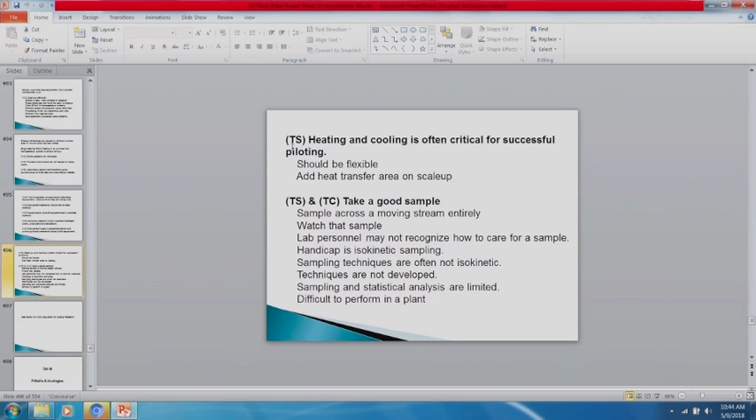I think last time we ended up with pitfalls and analogies. I think we covered heating and cooling. Pitfalls and analogies.

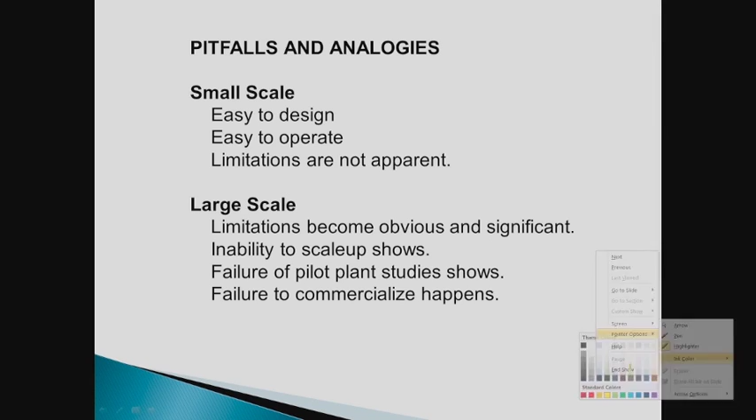Anyway, small scale is easy to design and easy to operate. Limitations are not nearly apparent. But at large scale, limitations become obvious and significant. The inability to scale up shows, the failure of pilot plant studies shows, and you have failure to commercialize, basically.

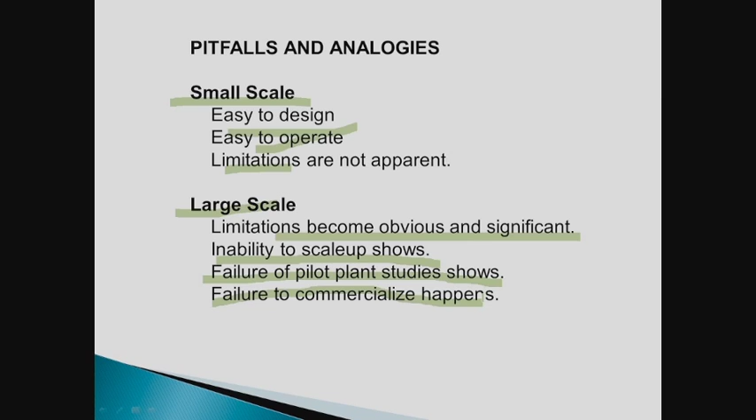In the technology transfer area, there exist some human attitudes, right? NIH, not invented here. People have an attitude that if we didn't think about it, then it's not worth worrying about. You also have people working in a box. That's tough. You also have poor communications. That's tough. And you have a definite lack of information. Now these are serious problems, right?

And we'll toss in the concept of the expert here for a second. You've got all kinds of experts out there. I quit being an expert professionally because I was more of a student rather than an expert—I was constantly learning stuff. So what happens if you have two experts together? They never really seem to agree. They're arguing, okay? And if they argue and disagree, it means that one of them's wrong, or at least one of them's wrong. Both of them could be wrong. My suggestion is, if one of them's wrong, why are they called experts?

So this human aspect of scale-up is quite interesting. It can lead to very serious problems.

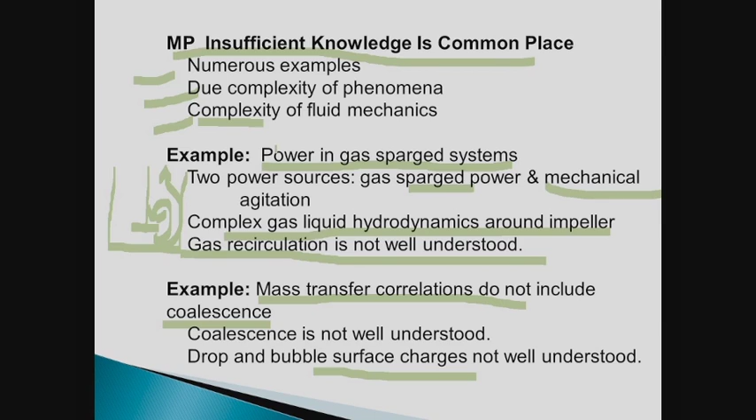Surface charge, electrical charges, being another. Anyway, so things are complex. That's the whole idea—it's a very complex environment.

Some process objectives are incompatible—basically, they can't be met, right? Procedures and operations available in the laboratory are not available in the pilot plant. Some of these are obvious.

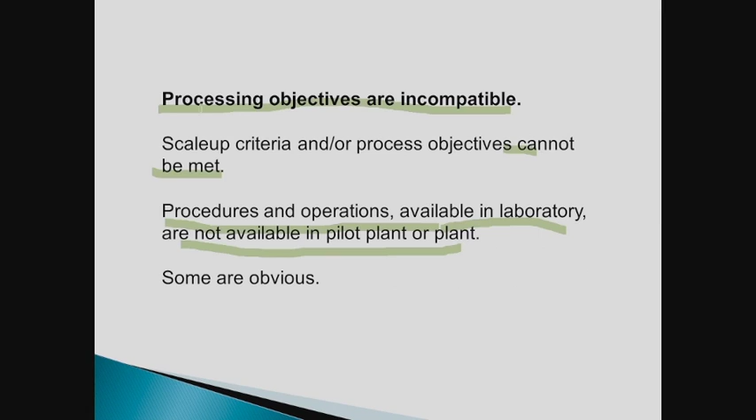An example is shaking tables, right? You can shake laboratory equipment—you can have a shaker table with beakers on it. You have a beaker here, and over here another beaker, and you can do your studies in beakers on a shaker table. You don't have that in the pilot plant.

So that's an example of something that's basically non-scalable. It's the idea of scalability—some systems are not scalable, they don't lend themselves to scaling. To be asked to scale a non-scalable system is painful for everybody involved.

Some processes cannot be scaled to larger sizes for technical reasons. One of them is that the phenomenon simply doesn't happen on a large scale.

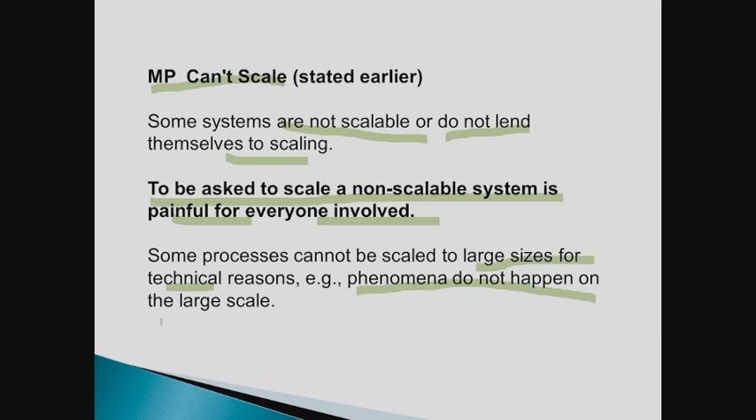An example: if the chemist has to break the beaker or the test tube to remove the product, that scale-up is not going to be easy. If the reaction yielded a sticky product which accumulated on the impeller, in the lab reactor they just shook it to remove the product, but you can't shake a 10,000-gallon reactor in the plant. You may perhaps jostle the impeller a little bit, but whether that lets the material come off, I'm not sure.

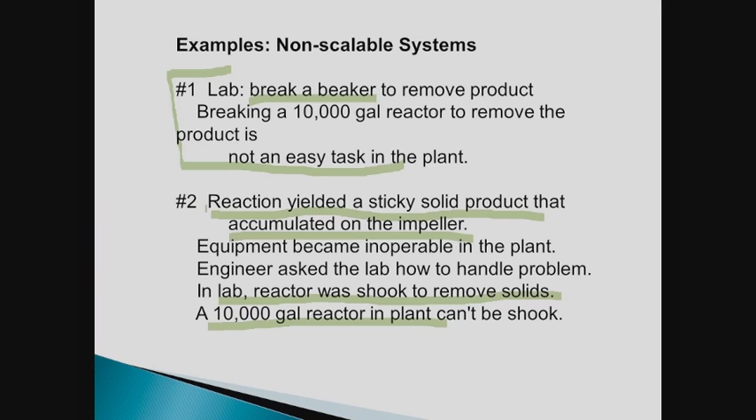Scale-up of a splashing regime, like shaker tables, is not necessarily possible—although I would enjoy the challenge of seeing if you could scale up from shaker tables to an agitated tank. That would be quite an interesting scale-up question. You can't have a 10,000-gallon shaker.

Some phenomena cannot be scaled since the phenomena don't exist at scale. The zeta potential is an example. Zeta potential measures, I think, the voltage across the double layer. So in the double layer, you have a lot of pluses here, and the pluses attract minuses—that's the double layer, with this being a surface.

That potential voltage drop across the double layer is not scalable, because often the flow regime changes and there is no double layer—you have flow coming in, removing the charges and carrying them off. In a highly turbulent flow, there's a lot of surface renewal going on, and a double layer is much more difficult to form.

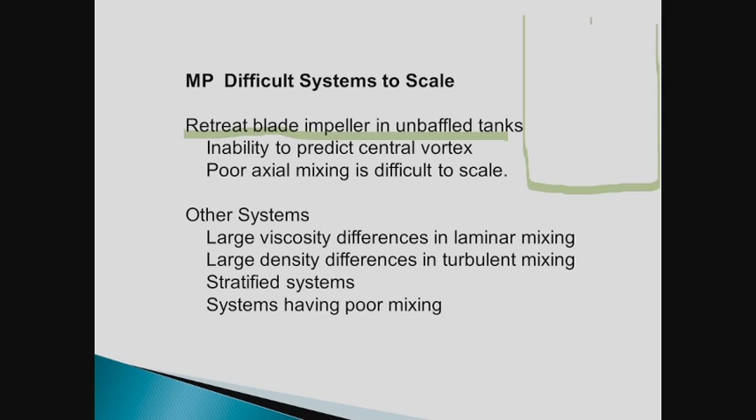Difficult scale, retreat blade and unbaffled tanks. I'd have to say that it's difficult to scale. You take this Pfaudler design, looks like chicken legs, right? It's made of glass, and it has maybe a baffle in here, a beavertail baffle, or an H baffle. H looks like that, I guess.

Now, the reason why this impeller is difficult to scale - by the way, this impeller is used everywhere in the pharmaceutical industry, about 50% of its use is in pharmaceuticals. So it's a very popular design, primarily for two reasons. One, it's glass, and two, glass is inert, doesn't participate in the reaction.

It also has a very large D over T ratio, D over T ratio of 0.7. That makes it very effective at mixing - a very effective large diameter impeller.

The problem is the flow behavior in this tank is a function of fill height. If I'm going to fill it all the way up, where the height is equal to the diameter, you have the beavertail baffle or the H baffle in there. That's one set of behaviors.

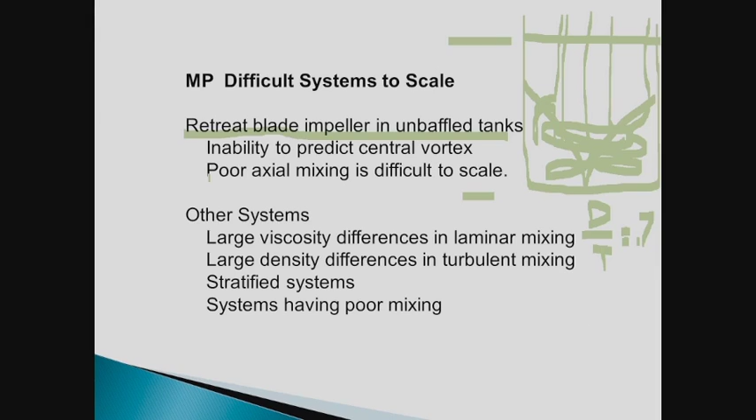differences in performance. So we call that - it might be considered a central vortex, and the inability to predict the vortex or the effect of liquid height on the vortex. With the vortex going through the impeller, you're going to have a lot of surface entrainment going on, probably poor mixing. Up here at the top, you'll probably have very good mixing.

Anyway, so you may run into difficulties in certain designs because the flow regime changes with volume or quantity, the hold-up volume. Remember, going back to our n theta, the number of revolutions to mix, it was a function of volume - n theta will go up as volume increases.

Other systems that perhaps will lead to difficulties in scale up. In laminar mixing, the viscosity is important, so you can anticipate large viscosity differences in laminar mixing may be difficult to scale. Similarly, mixing with large density differences - density is important in turbulent flow. As a result, large density differences may be difficult to scale up.

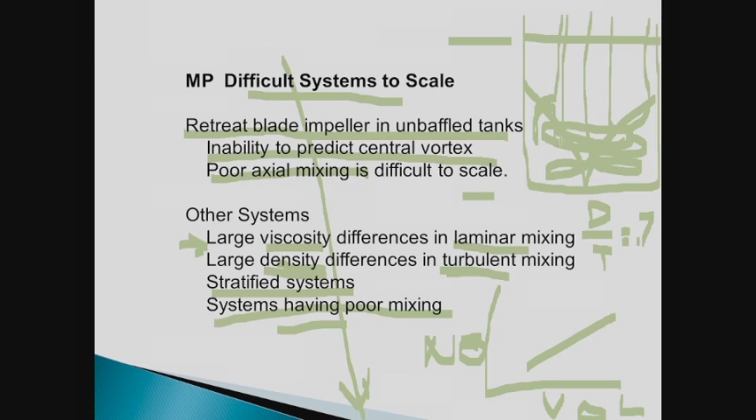So, transition regime - that's essentially also where the flow regime changes. Liquid height: a center vortex forms at low liquid levels, at high liquid levels there is no vortex formed. You have a difference in flow regimes occurring here. At low fill volumes, it may be very poor mixing because you have a tendency to have solid body rotation.

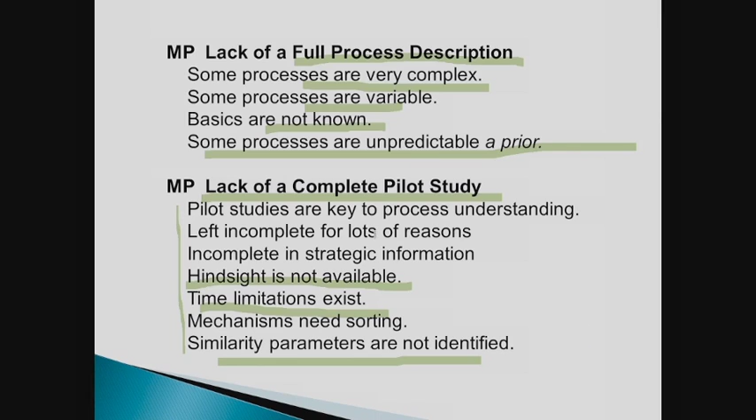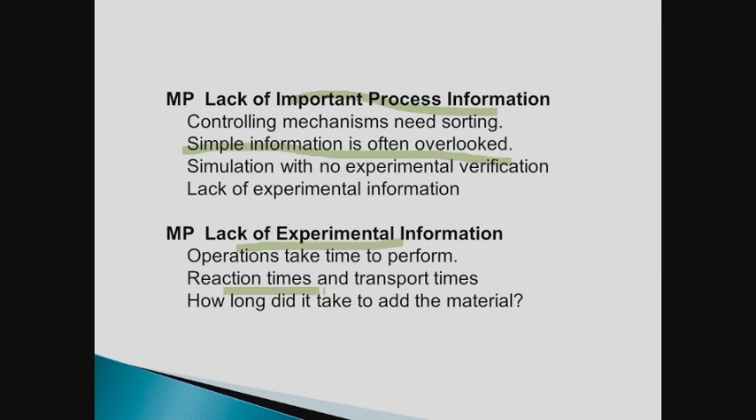So, lack of experimental information, reaction times and transport times or mixing times. How long did it take to add the material? Simple questions. How long did the reaction take? What was the dissolution rate?

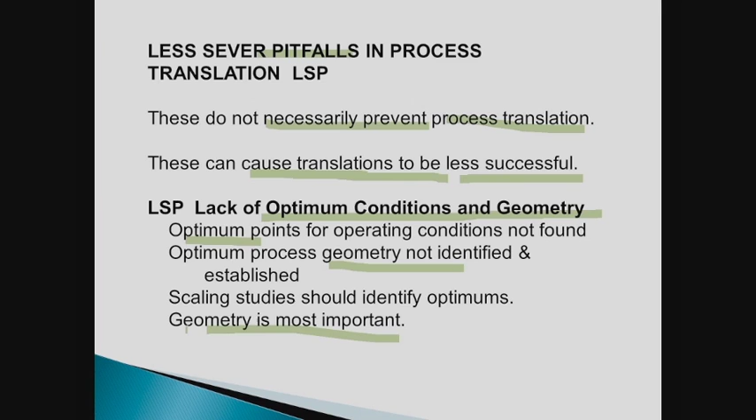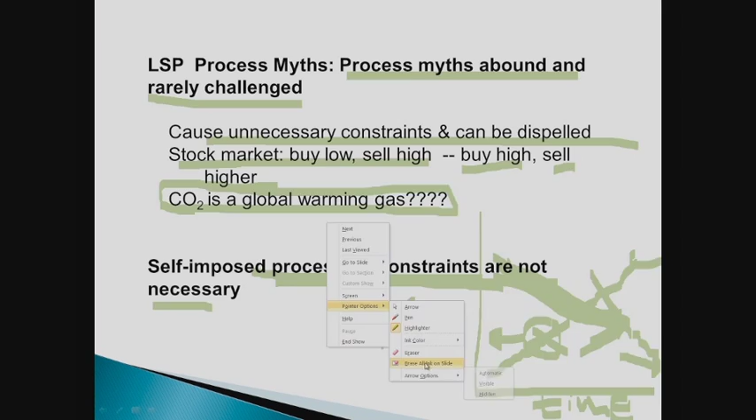Anyway, that's a suggestion. Now let's talk about CO2 a little bit, is it a global warming gas? You always see that being danced around. Just go camping. On a clear night, you're out there camping in your tent. So here you are in a tent, right? Everything's hunky-dory, and it's a clear night, and the stars are out. What happens on a clear night, it gets really cold.

Now then, if you camp out on a cloudy night, so we have another camping trip here, and it's all cloudy up there. And here it was very, very cold. And here what happens is the Earth radiates to the clouds, and the clouds radiate back. So on a cloudy night, it's a lot warmer, just generally speaking. So you got to ask yourself, why didn't the CO2 capture this and bounce it back to the Earth like the clouds do?

That's because CO2 is only sorta a global warming gas. It's not nearly as powerful as water. Water, in the form of clouds, is extremely warming, global warming. So the truth of the matter is, you should be monitoring cloud cover rather than CO2.

CO2, you got to recognize a very simple thing about it. It's plant food. That's the other thing about CO2. It's being picked on. Everybody turns around and talks about CO2, how bad it is. But CO2 is actually plant food. The plants use it with sunlight, and they go through this process of photosynthesis, and they make carbohydrates out of it. So CO2 is not bad. It's plant food, it makes carbohydrates, so it's a good thing rather than a bad thing.

It may come as an astonishment to you, what was really astonishing is the federal government declaring CO2 a pollutant when CO2 is plant food. Okay, I guess fertilizer or plant food is a pollutant if it becomes excessive. So anyway, some of these things about process myths should be questioned, like when they claim that the temperature of the Earth is rising, right? Global warming.

You have all these people on television or in the news talking about global warming, but they never show you any data. And in truth, if you go into this area and study it a little bit, there's two sets of data. One set shows global warming, and you talk about how the measurements were made. And another set of data shows global warming is not really happening. So you have two sets of data.

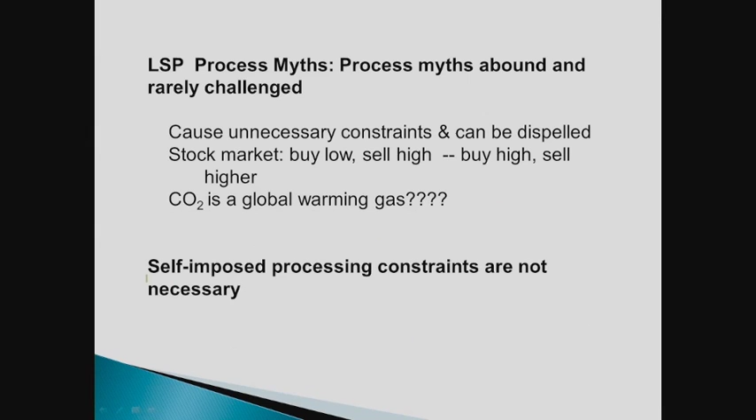So the whole idea is self-imposed processing constraints is not a good idea.

I think this is radioactive sludge, and only in famous tank 49 did the sludge have a yield point. In all other tanks, and there were 50 other tanks, there wasn't a yield point, at least as far as I understand the situation. So here's the Bingham plastic myth.

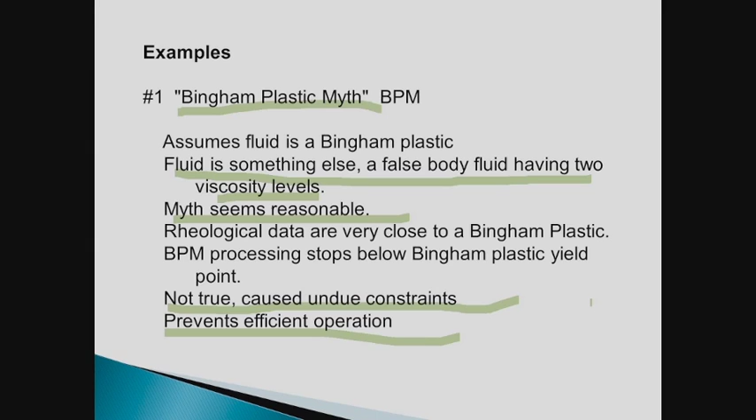But however, it's a process myth that every so often I got an email about this, saying I was wrong. Pretty funny.

Myth 2, the importance of rheology. Ooh, I'm going to get into trouble here. Oftentimes, the detailed rheology is unimportant. You hit the viscosity levels, you've got the most important part. However, the detailed rheology, you don't need it.

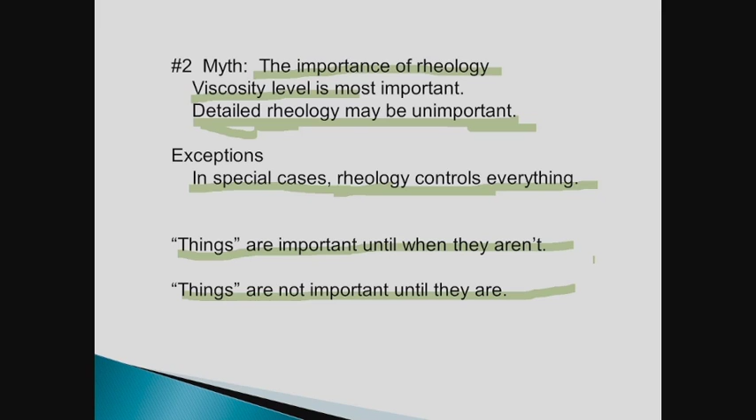Lack of time information - very important. Time is usually not recorded. Processes have different time scales. Again, your kitchen sink you can turn off very quickly, but a huge pipeline that's 10 miles long, 10 feet a second going through there, you can't really operate that like your kitchen sink faucet.

Lack of local flow behavior around the reaction zone. If the reaction is instantaneous, you need to record it as such. How long did it take to add the feed? At what level? How long did it take to fill the system? All kinds of questions.

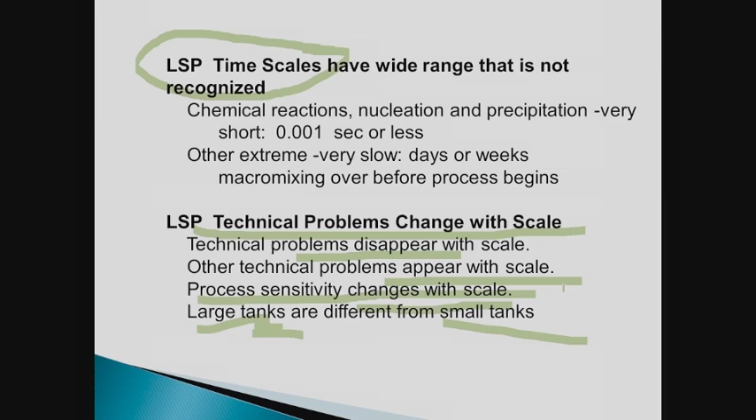Procedural requirements: unnecessary procedural requirements get scaled up, and that's not a good idea. Procedural requirements have to be based on the need for that particular procedure step.

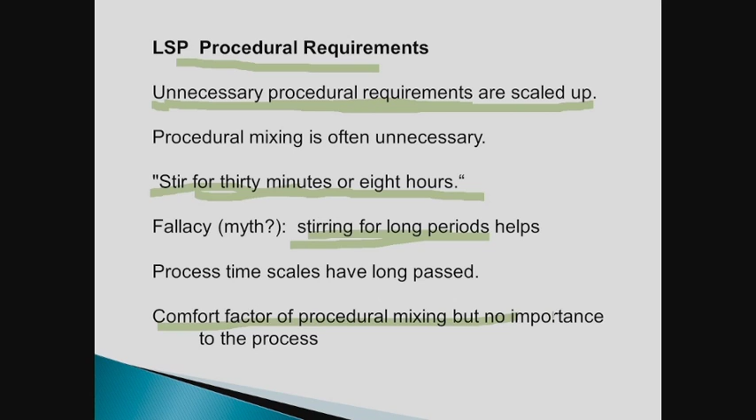You often see this: stir for 30 minutes or 8 hours, add and stir for 30 minutes or 8 hours. Stirring for long periods of time, I don't know what that does, but you ever notice people with their coffee, they continually stir it? Processing time scales have long passed—it's a comfort factor, apparently, with no importance to the process.

Local scaling and effects of heterogeneity: multi-phase systems are often heterogeneous, but spatial variations in properties occur. Specific local behavior may be important, and there's often little information on that local behavior.

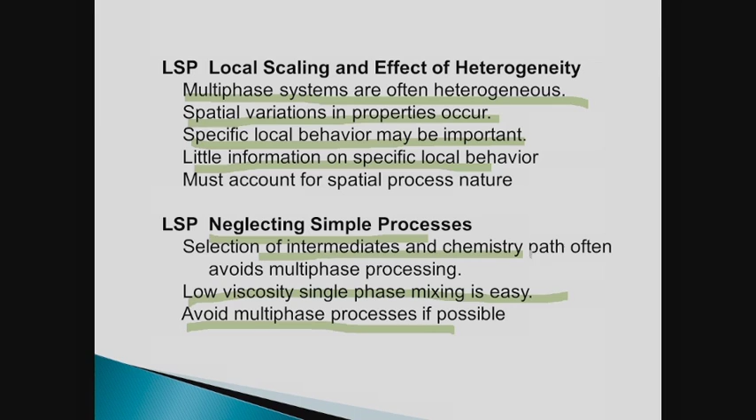Neglecting simple processes: low viscosity single-phase mixing is easy. You want to try to avoid problem processes and problem phases, and really select the chemistry path that avoids multi-phase processing altogether.

Lack of characterization of the process is very common. Inadequate flow conditions are also very common—good pumping and circulation may not be occurring, leading to formation of unmixed zones. An adequate D over T ratio may be necessary. Remember, in the transition zone, you can have an impeller mixing away, and it's well mixed inside this cavern, but the rest is stagnant.

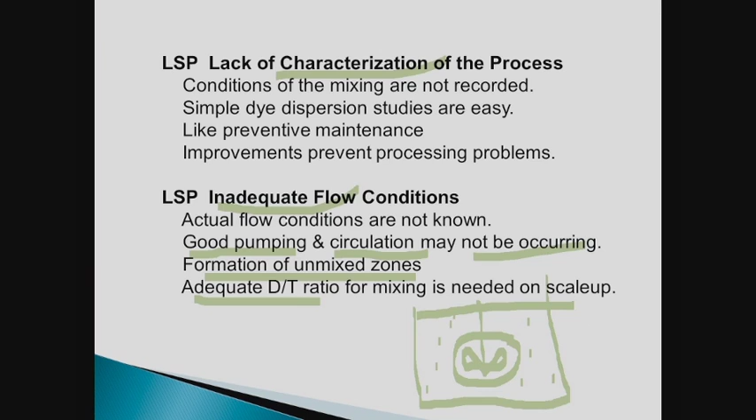Assumed models are often a source of problems. Avoid sticky solids are some of the worst problems—they adhere easily to equipment, are difficult to operate, clog pipes, and dewatering and filtering are expensive.

Materials change with scale, oh yeah. Material in the lab is not like in the pilot plant, and not like in the plant. Shear dependent viscosities: one shear rate in the lab, another in the plant, giving different viscosities in the lab, pilot plant, and plant. Moisture effects are very important, and material history is also very important.

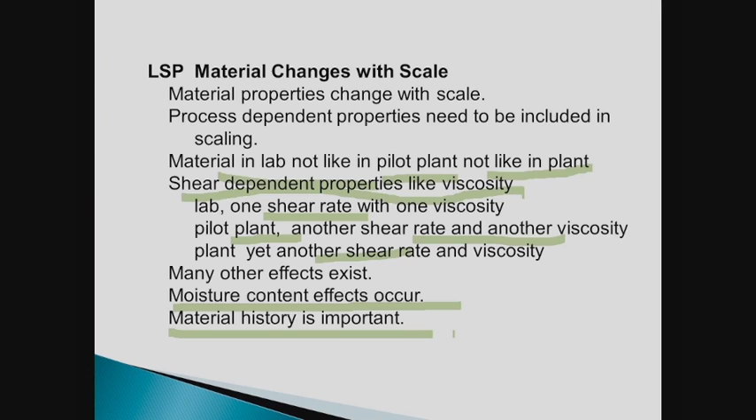Inadequate characterization of geometry: scale-up by draftsperson is possible and can occur, and this is not good.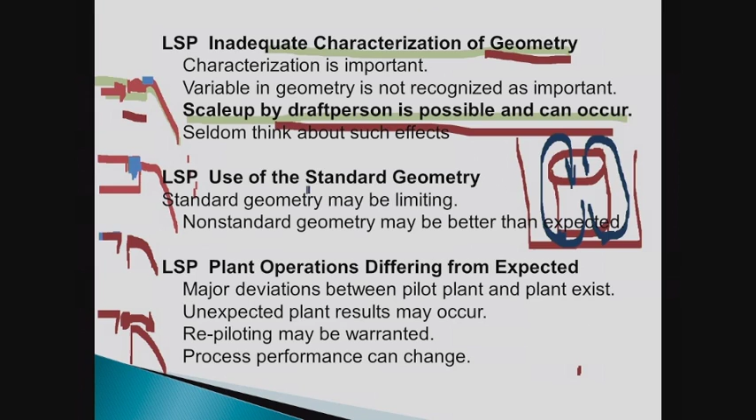Standard geometry—there's always better geometries. Non-standard geometries work better, right?

Here's a case in point. You had a crystallization process that looked something like this, and here you had a return line. So you had the crystals all up in here, and the return line—now they were returning a lot of large crystals, right?

So what they did in this crystallization process is put in a baffle, from right down here to there. So what happened then is the large particles went around and went out, whereas the very fine, really tiny particles went down and around the baffle and went out here. So there's a size separation here, right?

It's actually somewhat of a classifier. The larger particles sank, and the smaller particles were able to make the turn and go back to the crystallizer to grow more. Anyway.

A standard retrofit in industry would be a well-placed baffle. Well-placed baffle.

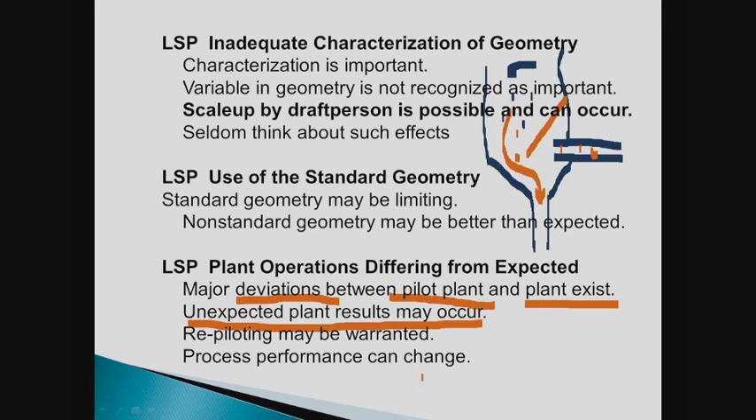Major deviations between the pilot plant and plant exist. Unexpected plant results may occur. Repiloting may be warranted, and process performance can change. So you want to keep your pilot plant—I don't know if I brought that out or not. You always want to keep your pilot plant so you can do some testing or process improvements.

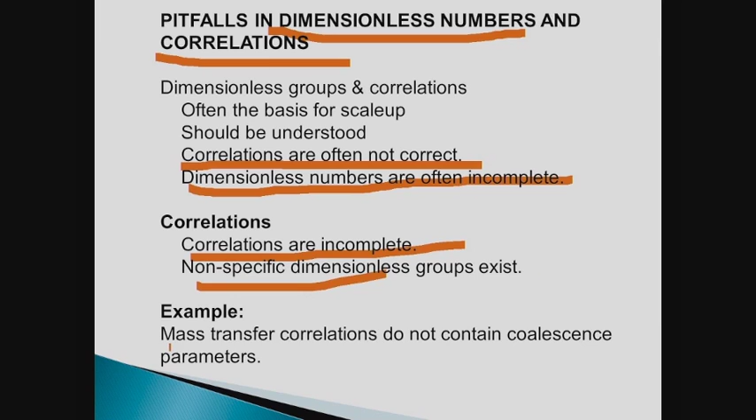Correlations, dimensionless groups, and correlations. Correlations are often not correct. Dimensionless groups are not complete. Correlations are incomplete, nonspecific—mass transfer correlations—you're starting with very limited data.

And the first one is Reynolds number, okay? Reynolds number is a fantastic number, but it can be very nondescriptive of the flow field. Equal Reynolds number does not mean same flow field. Very important point: a large diameter impeller at low speed has the same Reynolds number as a small diameter impeller at high speed. However, they're quite different in performance, even though they have the same Reynolds number.

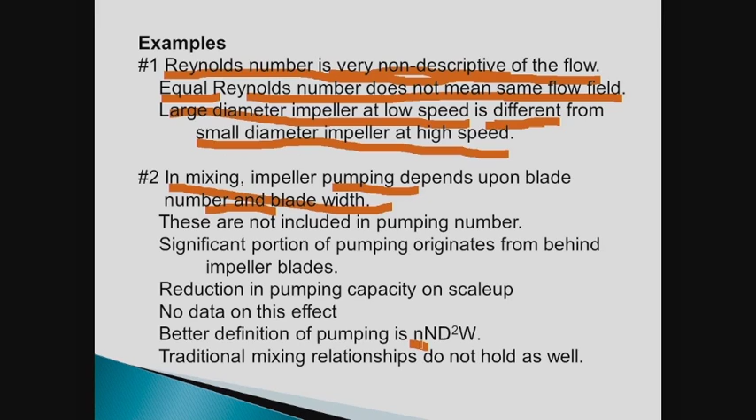And in mixing impeller pumping, there's got to be a blade width effect. Here's blade width effect and blade number effect. This is the pumping number that ought to be used—it ought to take into account the number of blades and the width of the blades. Better definition of pumping number.

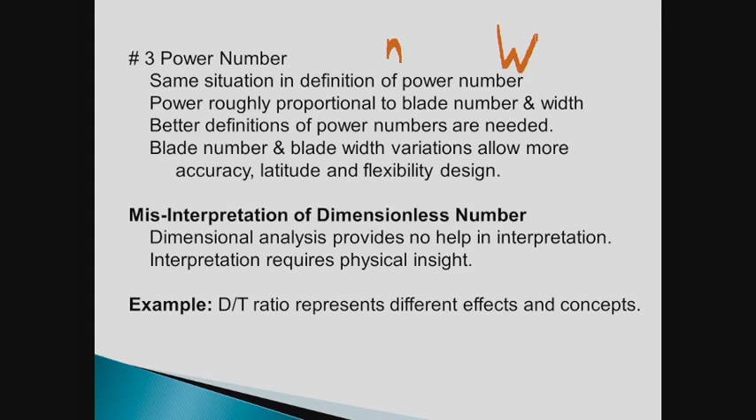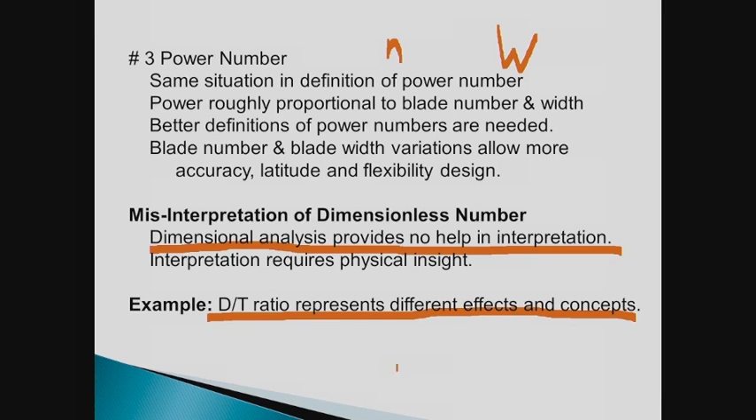Power number, the same thing—you should have a blade number in there, and there ought to be a blade width effect. D over T represents all kinds of effects, right? And it could be misleading as well. Dimensional analysis provides no help in interpreting this. You have to have some physical insight to do the interpretation.

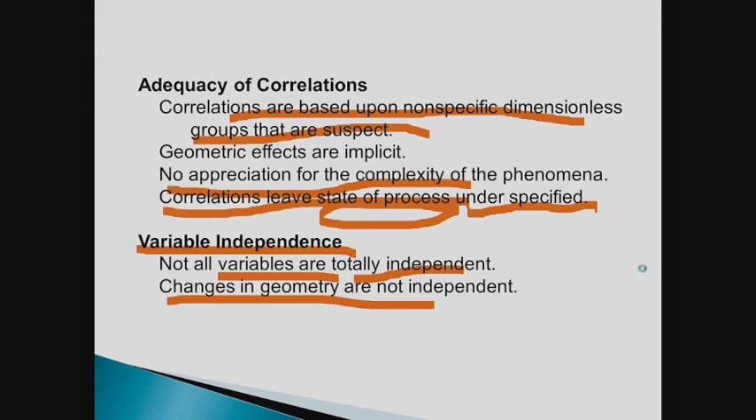Most correlations are based upon boundary layer analogy. An agitated tank is very similar to a boundary layer—processes behave as a boundary layer. Some phenomena may follow that, some don't. Boundary layer shows an increase in transport with length; that's not true in an agitated tank. Energy source in an agitated tank is fixed—not so for a boundary layer. So there can be a major difference between boundary layer and agitated tanks.

And we haven't progressed that far yet. We're sort of like in the dark ages, right? You may think we're advanced—yes, there's artificial intelligence, yes, yes, they'll replace all the humans in the world with machines. But artificial intelligence only means there's going to be artificial stupidity or artificial mistakes.

An example would be length, area, and volume dependencies not included. Mass transfer is a surface volume process. The volume in which the contacting is done should appear in the correlations—this characterizes the process, but it doesn't occur. In such contacting, a contacting band often forms around the impeller, and that's not included.

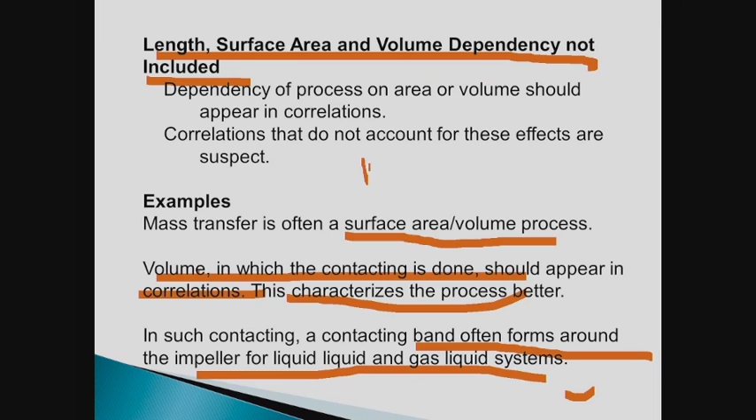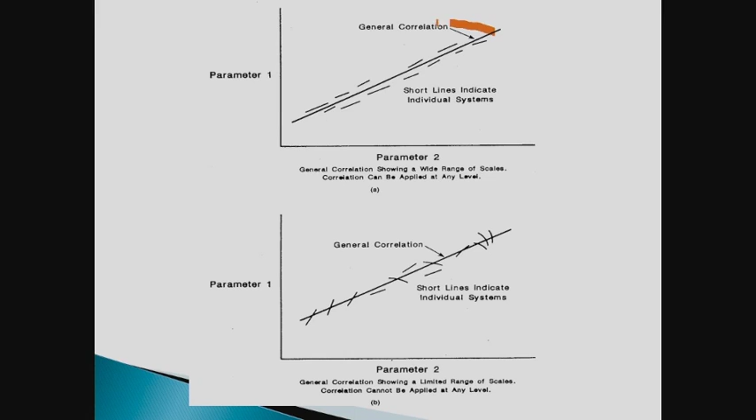Reference geometry should perhaps be in correlations. Scrutiny of correlation, we already mentioned that. I suspect this is the exception rather than the rule.

You go to your boss, and here's the general correlation, and your data comes in like this. What's your boss going to tell you? Boss is going to tell you you're wrong, but not necessarily, because this happens all the time. Individual systems may not follow the general correlation. Case in point, I've already pointed this out. There are significant differences in behavior here.

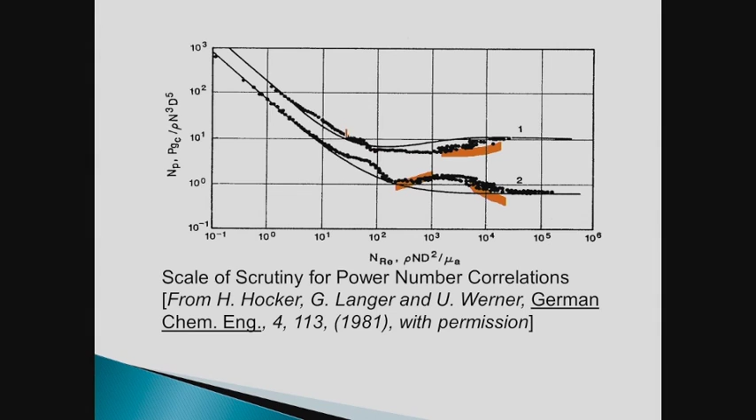Scale of scrutiny for a correlation. At what level does a correlation hold? Correlation predicts variables over a wide range, but maybe not over a short range. Other variables are acting as difficulties in piloting studies.

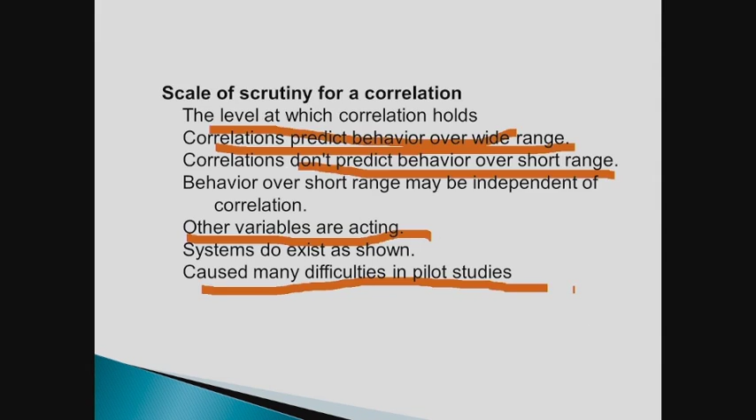Now, what's really cool about this, it's a very pretty graph, and it could be replaced by simply a table. The important item is right there. You have turbulent mixers going, probably turbulent, put it right in there. And over here you have the transition regime.

This is not the regime you want to use these impellers in. And up here you have the laminar regime. These are not the impellers of choice. This is a no-go.

Although the data is there and it tempts you to use the impellers in this region, you shouldn't. This is the classic example of using a turbulent mixer in a laminar application. And really all you got to do is note that these are leveling off as constant values.

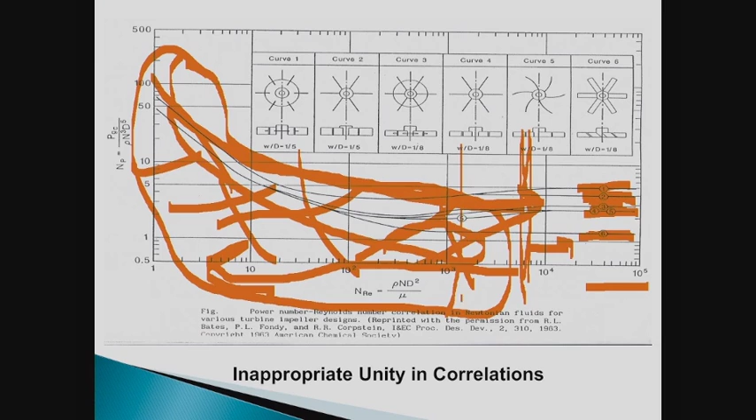All right. So, case in point, don't use a turbulent impeller in a laminar application. Turbulent equipment will most likely fail in laminar applications.

Remember the video that I showed you, G.I. Taylor, with his little boat, his two boats. One was powered by a spiral. It looked absolutely ridiculous, but it worked. The other one looked like a regular rudder. It failed, basically.

So that's an example of turbulent mixer or turbulent equipment being used in a laminar application. It's a very serious design flaw, right?

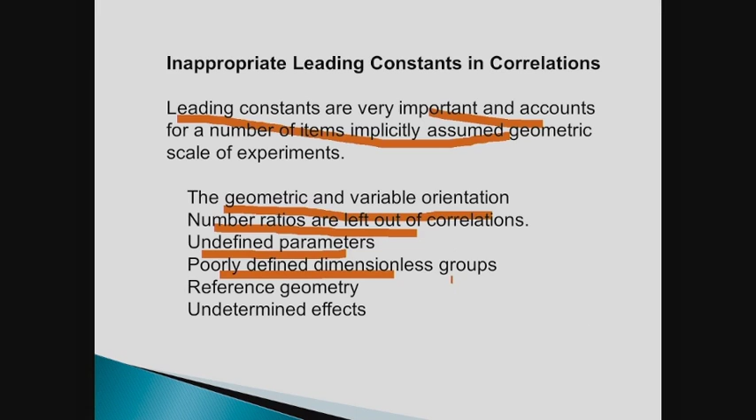Lead constant, very important. A factor of 2, yeah. It may account for geometric and variable orientation, number ratios left out, undefined parameters, poorly defined dimensionless group, reference geometry, and a lot of undetermined effects. There's an awful lot of stuff that's buried in this K, right?

Viscosity squared, generally speaking, and you have surface tension and density. And I think there's a length in there somewhere. What this number takes into account is differences in viscosity and includes the effect of surface tension.

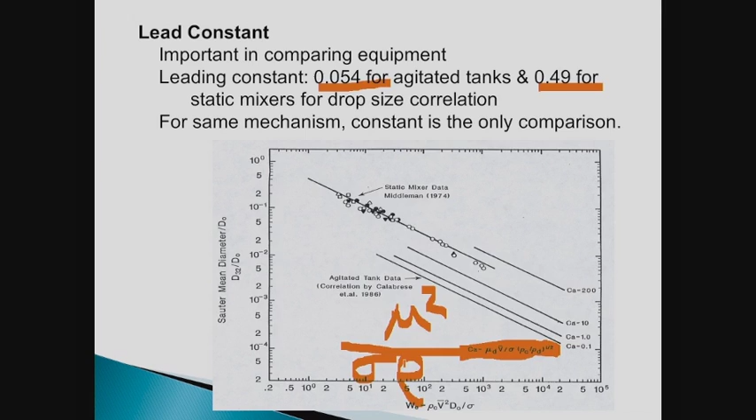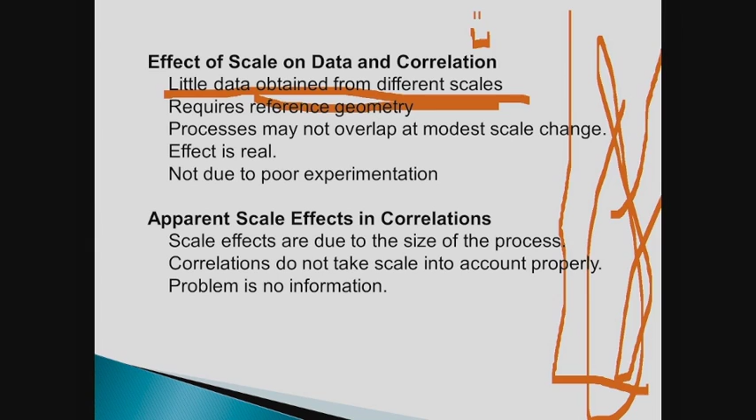Effect of scale on data. Little data is taken at different sizes. So if you're going to scale up, you really need to close the gap there. Because your plant is over here, right, and your lab is here. You got to close the gap of information that sits there.

Reference geometry is needed, perhaps. Processes do not overlap at modest scales. The effects are real, and it's not due to poor experimentation. Little data is taken at different sizes. You need to fill that in.

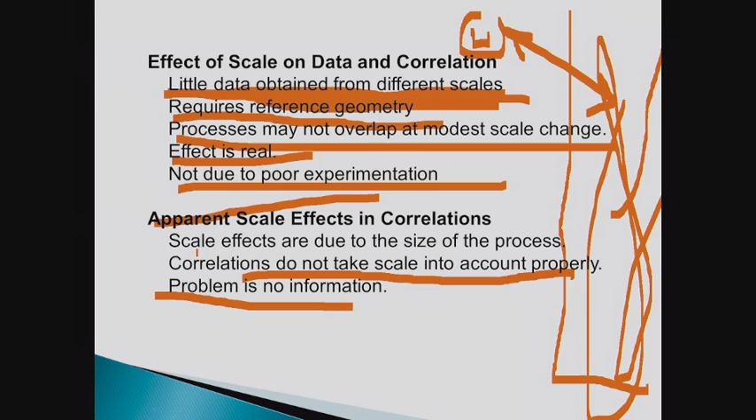Apparent effects of correlations. The problem basically is you have no information. Scale is not taken into account. Correlations do not take scale into account properly. Scale effects are due to size of equipment. Variety of correlations - there is a distinct lack of variety in correlations. Not as many scaling correlations as they may appear.

Analogies. Oh, I like analogies. They're a great idea. Analogies are used everywhere, and they're very, very powerful. I highly recommend the use of analogies.

For example, the story of the benzene ring. It looks like this, there's 6 sides to a benzene ring. The chemist who discovered its structure was dreaming one night and saw snakes dancing around, and they formed this shape, the benzene ring. When he woke up, he had the benzene ring figured out.

Basically, you can think of the ski lift being invented, believe it or not, in Miami, Florida. The idea is big bunches of bananas, not the bunches you buy in the grocery store, but the big bunches. The chap who owned a ski resort in Idaho was watching how these big bunches were unloaded coming off the boat from South America in Miami. He was watching it, and he said, well, if they could do that with a big bunch of bananas, he could do that with a person down here that wants to go skiing. So put the skis on the person down here.

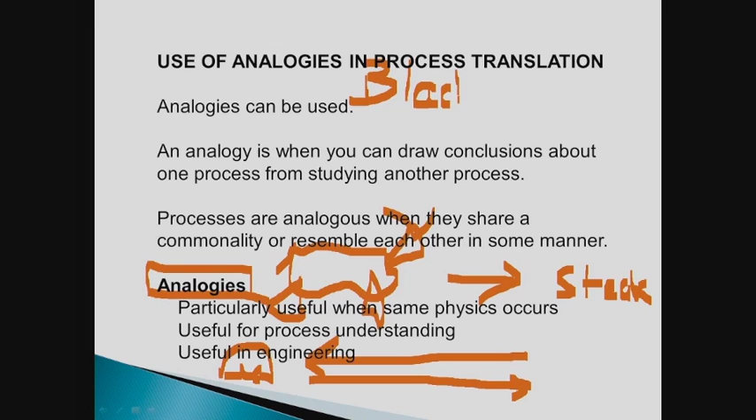All right. Bananas, cars, and cattle. And there was another one, a guy named Black and a guy named Decker were drinking whiskey Sunday afternoon, don't know which way, there was a gun on the table. Black and Decker. Who knows who thought of it first, but that gun basically resembles an electric hand drill. So the basis of the electric hand drill was gotten by drawing an analogy to a pistol.

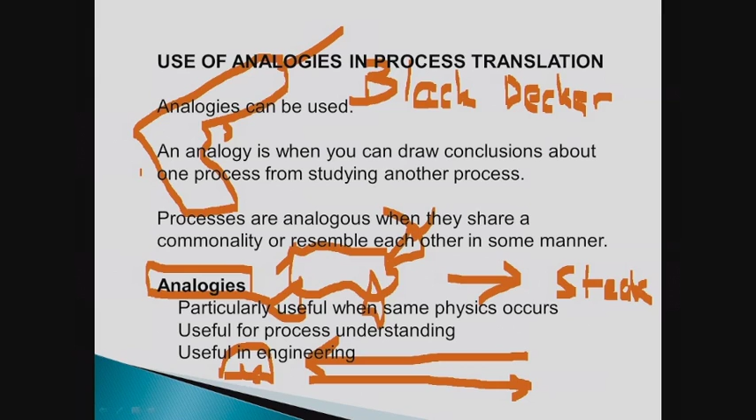So analogies are quite useful in understanding things, how things actually work. Useful when the same physics occurs, useful for process understanding, useful in engineering.

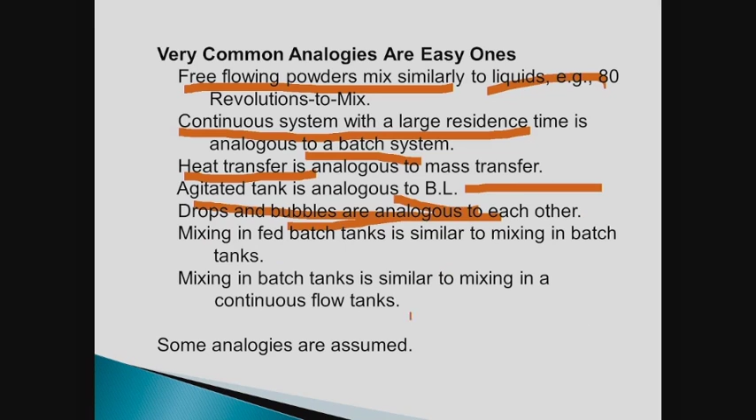Free-flowing powders are like liquids. Continuous flow systems with large residence times are like batch systems. Heat transfer is analogous to mass transfer. Agitated tanks are analogous to boundary layers. Drops and bubbles are very similar to each other. Basically, analogies work very well.

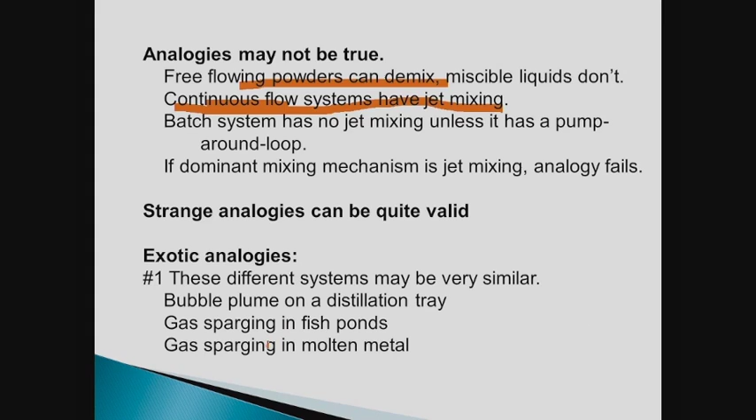Analogies are not necessarily true. Free-flowing powders can demix. Jet mixing occurs in continuous flow systems. So some analogies work and some analogies don't work.

There's strange analogies. For example, different systems can be very similar to each other: bubble plumes, gas sparging, and molten metal. The fish ponds and the metallurgist types I run into get very angry when I tell them molten metal is just a liquid. But it is.

But it's going to behave quite differently than normal liquids like water, because it has a very high heat content, and it has a very high thermal conductivity, meaning that when it hits something, it will turn to a solid very quickly, unlike water. So there are similarities and there are differences. Molten metal is very similar to water, and then again, molten metal is not similar to water.

Biological cells are very similar to liquid drops. The cell wall is similar to surface tension. Flocs are similar to liquid drops. The electrostatic layers of flocs are similar to surface tension.

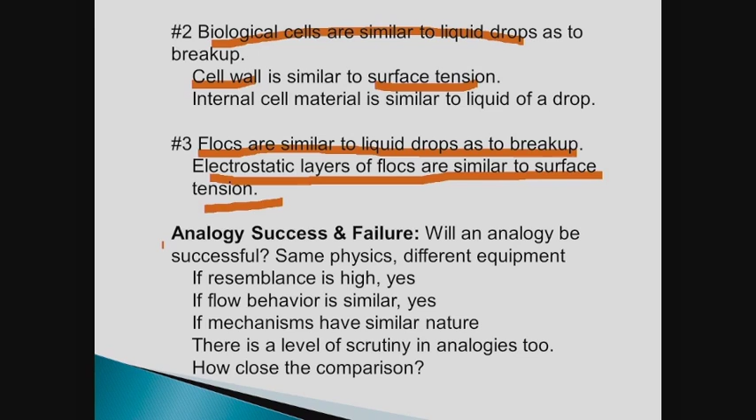Analogy success and failure: is the resemblance high, yes? Is the flow behavior similar, yes? Is the mechanism similar, yes? So there's a level of scrutiny for analogies too, how close is the comparison going to be?

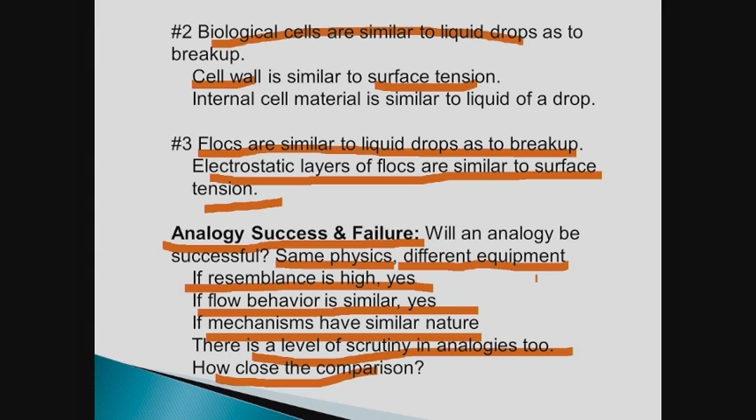What we have is the same physics, maybe with different equipment. Analogies are successful if they have the same physics or the same processing. Food analogies, there you go.

Basically, a lot of your processing in the kitchen—so we have a kitchen sitting here. The processing in the kitchen is very similar to the processing in your plant.

Foods can be Newtonian or non-Newtonian, sharing process experience as a common basis for analogies. For example, mixing pigment into paint, you get fish eyes. You also get fish eyes when making pancake batter at home.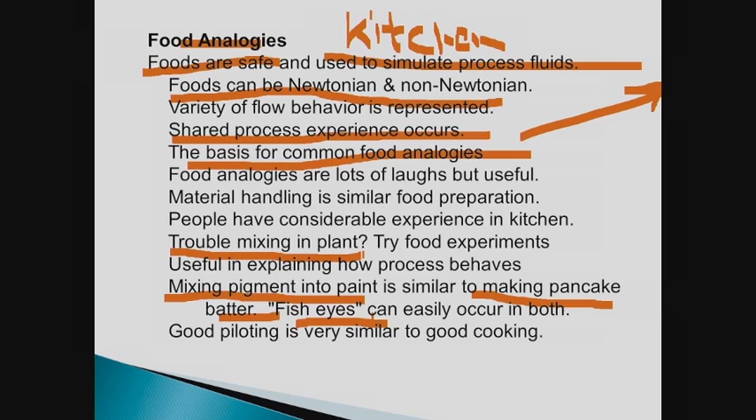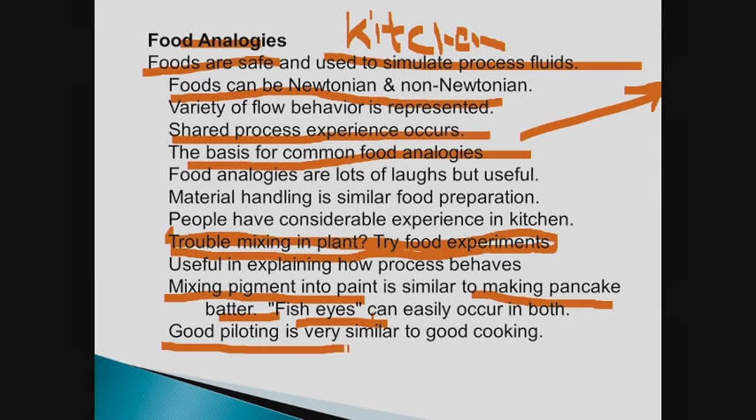So if you're having trouble mixing in the plant, you might want to try food experiments in the kitchen. I recommend everyone in the piloting area learn how to cook if you don't already—I know how to cook, I got to eat. Anyway, learn how to cook. Good piloting is very similar to good cooking.

Heat transfer analogy: heat transfer from a pipe is similar to heat transfer in an agitated tank. But the analogy fails because you have a D over T ratio effect in the tank that you don't have in the pipe—internals affect or interfere with the flow. So there's no analogous D over T effect in heat transfer occurring into a pipe.

Having said that, let me see if I can change that. What happens if I have a pipe and add multiple small pipes inside it? Now I may have a D over T effect—so the analogies only partially hold. Now this one's kind of useful.

And then some calculations misapply correlations, basically. There are fundamental reasons why correlations occur. The Nusselt number is a function of Reynolds number—you can derive that from fluid mechanics. The number of revolutions to mix is tank volume divided by impeller pumping; that's where it comes from.

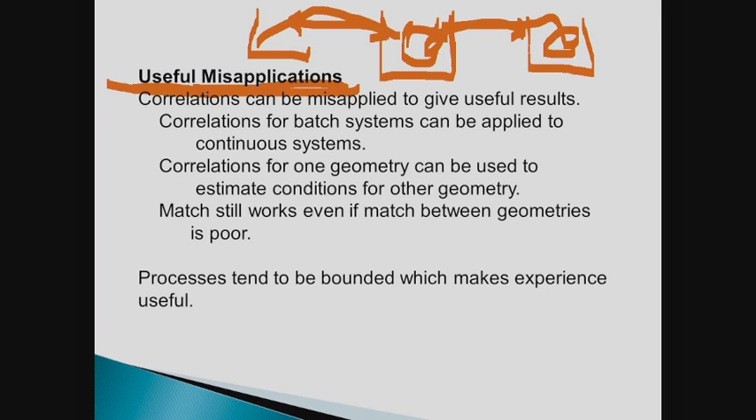Now then, we've got to tell the truth here a little bit. We were saying agitated tanks use boundary layer analogies. So what we'll do is take the heat transfer correlation and remove everything except length, and we find out that the heat transfer coefficient goes up to the d to 1/3 power.

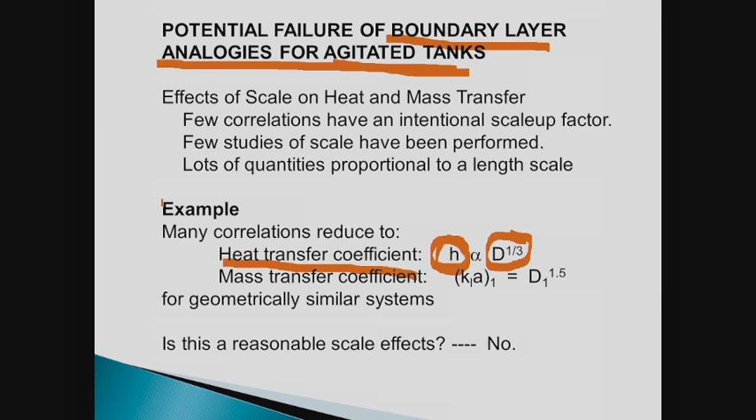Now this is actually a very serious problem. We do the same for the mass transfer coefficient—remove all the dimensions, all the operating variables, all the fluid properties, everything—and reduce it down to simply how the mass transfer coefficient varies with length. Then we ask: are these simple effects reasonable?

Unfortunately, the answer is a big fat no. If I start changing my D over D ratio, as in scaling, I quickly find bad news. At scale 1, everything's fine, but when I go up by a factor of 5, I get almost a 1.7 increase in heat transfer coefficient. Going to a factor of 10, I get a factor of 2 increase. I'm not sure that's realistic.

It gets even worse in mass transfer. If I go up by a factor of 5, I go up by a factor of 11 in mass transfer coefficients. That is not reasonable.

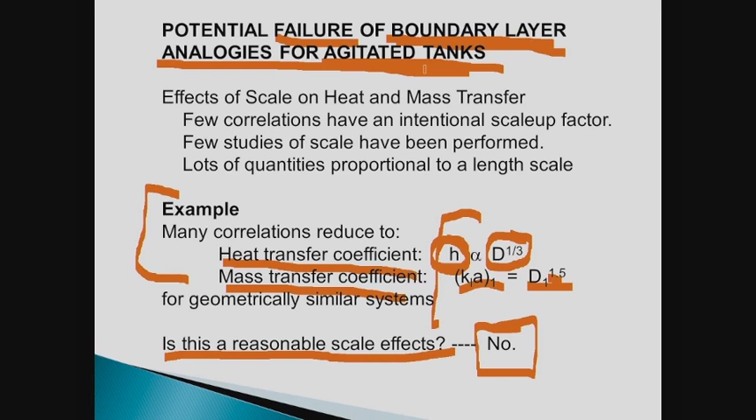So what I'm suggesting is that because we're doing boundary layer analogies and applying them to an agitated tank, the information we've gotten from boundary layer studies doesn't translate or apply to agitated tanks. This is a serious challenge for us, and you can quickly demonstrate that with these types of simple calculations.

So here you have the scale, and here you have what the heat transfer will do and what the mass transfer will do. This says it's highly improbable—there's no known mechanism to cause these phenomena. It's highly likely that the heat and mass transfer coefficients will be less than that of the small scale, or of similar magnitude, not a factor of 2.

Fortunately, scale change of 100 or 1,000 in length is seldom encountered. Scale effects are present in correlations but not recognized. Here are examples of the breakdown of the boundary layer analogy, where it occurs. A boundary layer analogy fails.

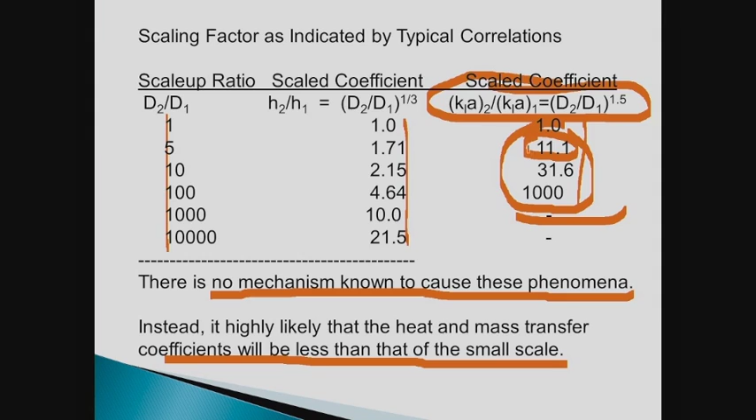Going back to this, the mass transfer coefficient is notoriously known for being difficult in scaling up, basically, and you can see why. You're getting unrealistic predictions by using a regular boundary layer correlation, assuming it applies to an agitated tank. You're getting an unrealistic result, and you're anticipating this result to occur by a factor of 11? No, it probably won't go up by a factor of 11.

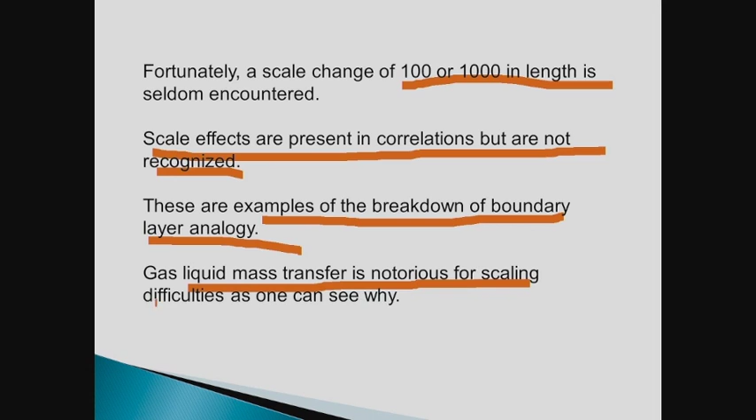So gas liquid mass transfer is notorious for scaling difficulties, and you can see why.

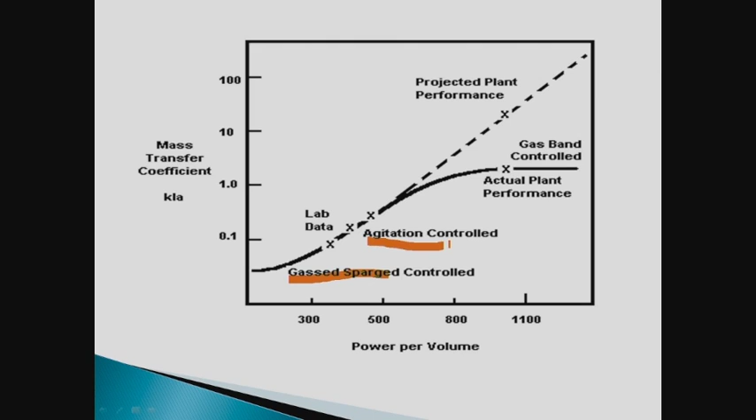Serious difficulty. General conclusions, all right. Engineering—this is the conclusion of the entire course. I appreciate you lasting this long. It's tough.

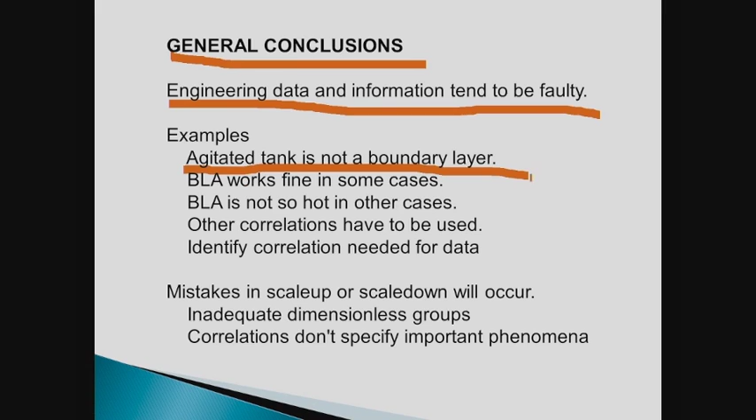General engineering data tend to be faulty. An agitated tank is not a boundary layer. Sometimes it's fine to use the boundary layer analogy; in other areas, not so much. Mistakes in scale-up occur due to inadequate dimensionless groups—correlations don't specify the important phenomena. Unrealistic expectations occur. There are some things that are not scalable, right?

Zeta potential behavior, and fouling design, just to name a few. Gas band, gas sparging, those things—lots of changes occur when you scale up. That doesn't mean you can't eventually be successful, but it's not going to be easy. Lots of technical mistakes occur. Pitfalls are waiting to be made. Scaling mistakes can be very costly.

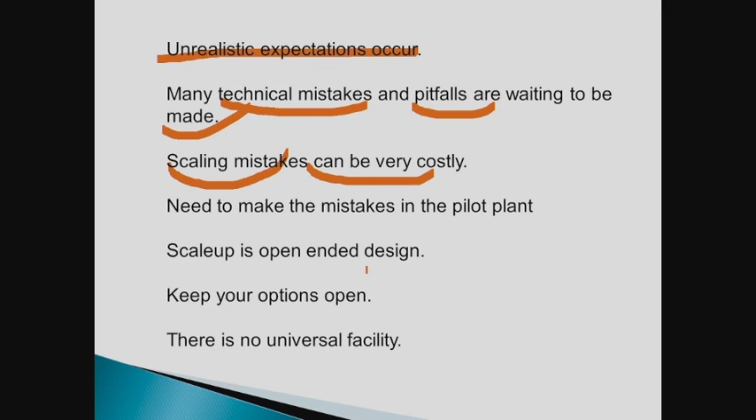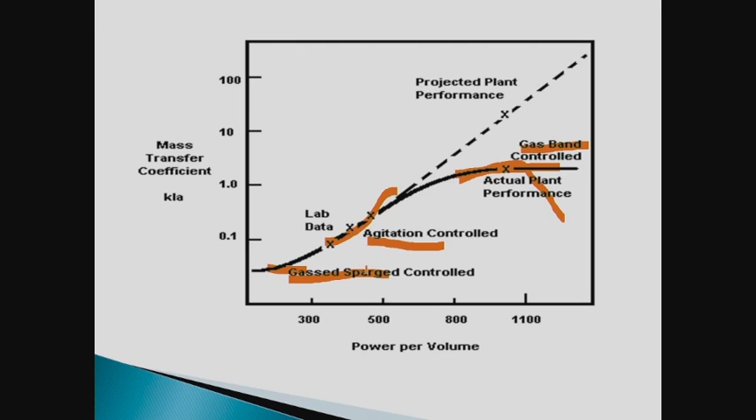That is, let's go back to this one right here. It was quite a disappointment. It's quite the rumor mill—you only learn this through the rumor mills, right? What people say by word of mouth. This is not written up, nor is it published in the newspaper, right? People don't like to publish their mistakes, right?

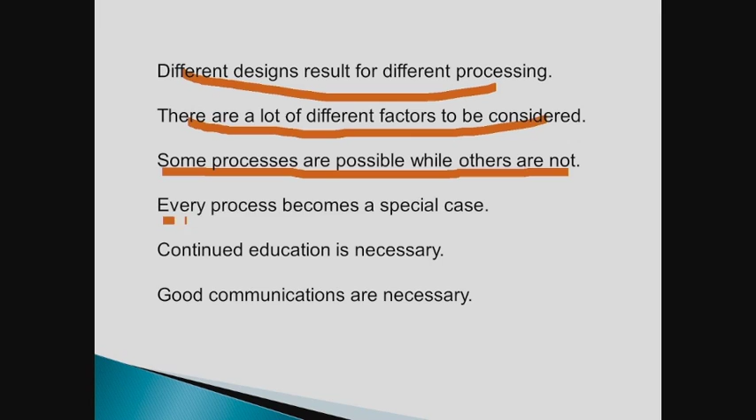Design is open-ended. You need to keep your options open, and there's no universal facility. Different designs give results for different processing; there are lots of different factors to be considered. Some processes are possible, others are not. Every process becomes a special case—this is very important right here. Every process becomes a special case.

You need continuing education, you need good communications. And I will emphasize, by continuing education, the comment I made about experts. You have two experts, and they're arguing—you could probably assume one of them was wrong, or both of them were wrong. So what it indicates is perhaps you need to go study some more of your process. Listen to the experts, and then realize that maybe there's a lot more to it than what they're telling me.